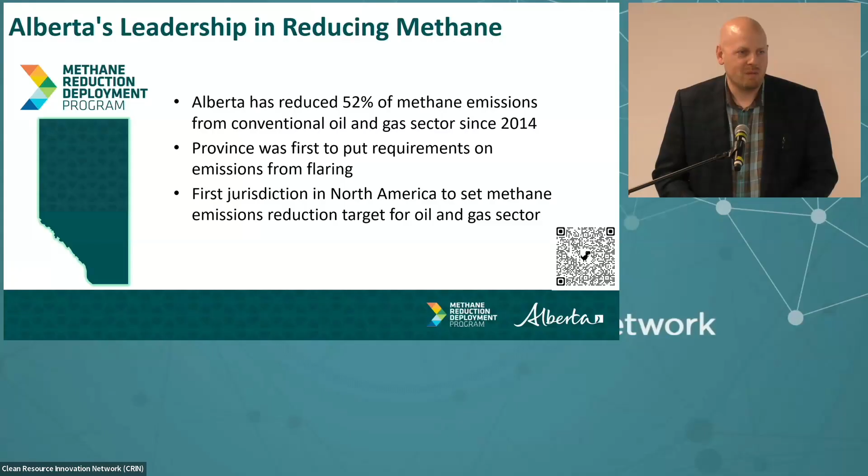CRIN's role in this is to help with the business development and industry outreach side, so I hope that anybody online or in person here that wants to discuss the program further, get a hold of me. I'm happy to talk about it. That's what I'm doing, and one of our members, Modern West Advisory, are actually delivering the program along with ERA. So lots of involvement there, and very, very proud again to be involved in that.

It is a $22.4 million project, covering up to 50% of eligible costs on emissions reduction projects, up to $1 million per project, and also $1 million per participant or parent company. So if you're an oil company, you can get up to $1 million of funding, which is essentially a $2 million project when you look at 50% funding.

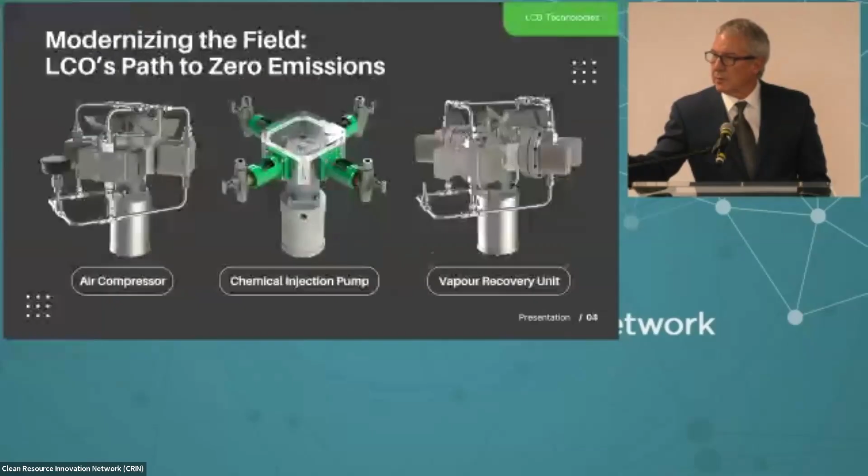Hello everyone, thank you for the opportunity to talk today. I'm Steve Froehler, owner of LCO Technologies and the inventor of that piece of equipment right there. This happened to me the last time I was up here - I think I need somebody smarter than me to... here we are.

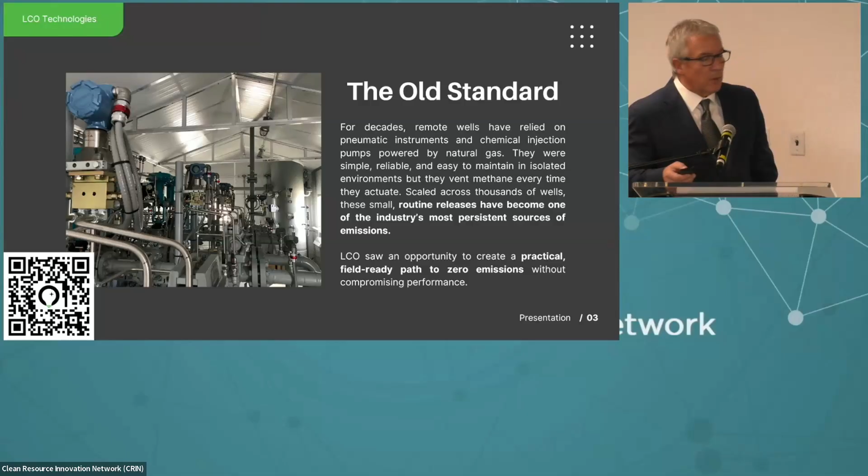So LCO Technologies, that's me. Been at it for 30 years, working on the Crossfire for about the last 8. I was asked to do this on an educational basis, and I apologize in advance, because I think everyone here understands how we've taken this journey in Alberta to reduce our methane emissions by 52%.

But there are a lot of people online watching this who don't understand how we've done it. Frankly, I'm astonished at times talking to people at various events, especially back east, when we ask if they're even aware we've done this - and the answer is no. So I'm happy to be here to reinforce that we're kind of killing it out here, and I'm happy to say LCO Technologies has made a fairly decent contribution to that effort.

This all started after 2014, when the industry looked at where methane venting was coming from in conventional upstream oil and gas. When a producer has to put a well in a remote location with no power, they'll take a small amount of gas from the well and condition it on site - knocking out the water and sand. Now they've got clean methane, or clean gas.

It's rarely ever just pure methane, but they've got this clean gas they can use like air in a garage where you'd use an air gun to take off a tire. In this case, we're using this gas as a means of manipulating instrumentation - to control pressure, level, flow, and drive pneumatic-powered chemical injection pumps. The naughty bit is after we finish exploiting the pressure, we then vent that gas to the atmosphere.

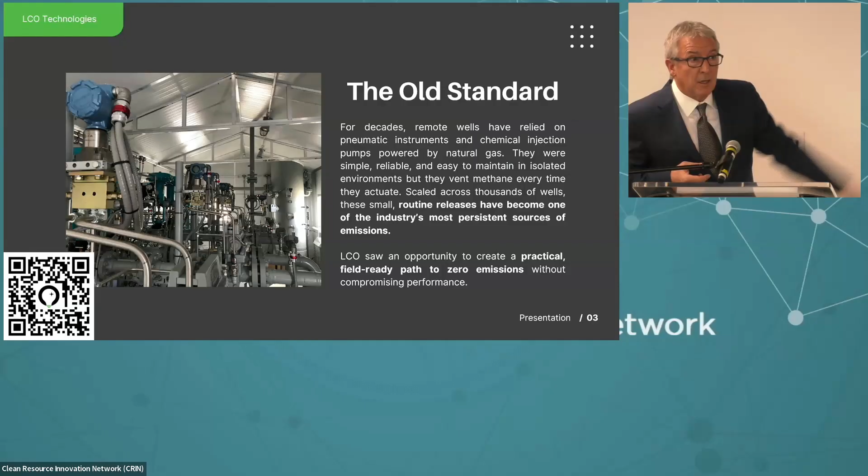So here we've got 3 examples of the equipment. We've got an air compressor, a chemical injection pump, and a vapor recovery unit. These are the 3 key areas from conventional upstream oil and gas that

emit quite a lot of gas into the environment. And we have solutions for these, but it's not as straightforward as I make it sound. It's not super easy to just take air and a compressor, run it on solar, and have the problem solved.

It's not that easy. It started with taking high bleed relays that were in all that instrumentation. You saw that skid we showed you earlier. I don't know how many relays were in that unit, but they started off with what were called high bleed relays. The industry saw an opportunity to significantly reduce their carbon footprint, or the amount of methane gas they were venting, by simply changing these relays from high bleed to low bleed.

Great, so you've reduced your methane output by, how much was that, Blake? About 5 to 8%, or 5 to 8 times. So in some cases you were getting down to 1/8 of the original amount of gas being vented to the atmosphere, but you're still venting. It's better, but not quite perfect. But it was a really great way to significantly reduce the carbon intensity of conventional oil and gas.

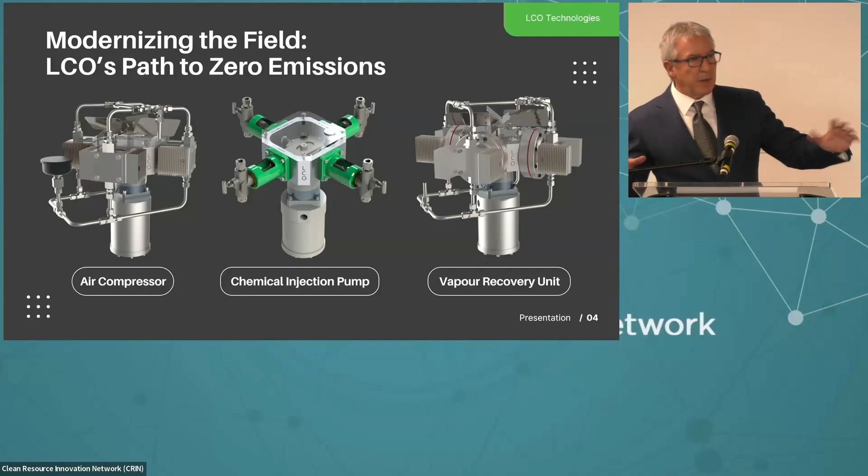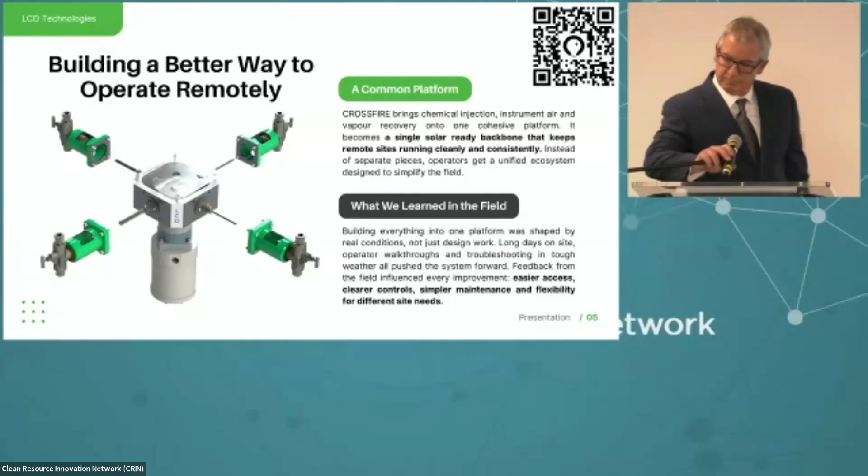We're using a common platform. The piece in the center is the common platform—that's an explosion-proof drive. It can be configured as either a pump, a compressor, or a VRU. So you see the section in the center here—that becomes common to all three pieces.

The beauty of it is I can mass produce it, and I can do it for less because I can mass produce it. It makes it easy for end users because now it means fewer spare parts, easier to get equipment.

Ultimately our objective is to prevent methane emissions and improve efficiency. The problem with everything we do here, being environmental, is that even though everyone talks a big game about wanting to protect the environment, our equipment is still considered, for the most part, just an expense. It's an expense and it's hard to justify—well, it's not hard to justify, it's hard to reconcile when you're talking to shareholders and things like that.

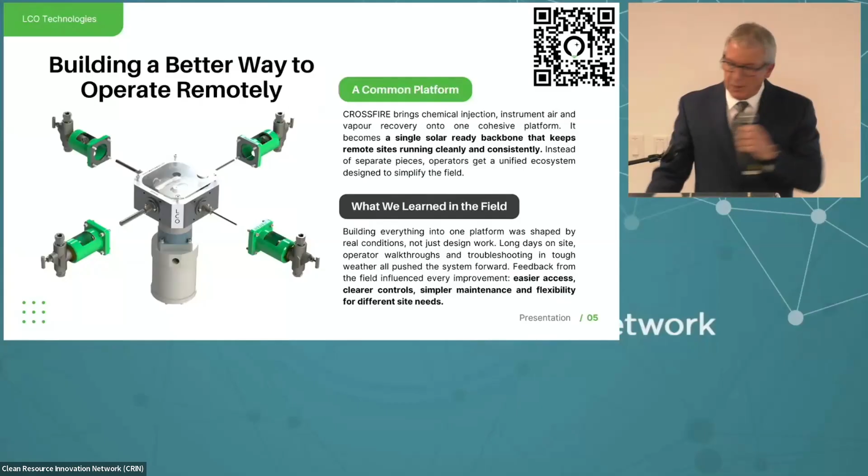What we need to do as technology developers is deliver more than just eliminating methane emissions. We need to deliver productivity gains. We need to provide things like data. We drive the equipment with a microprocessor-based controller, and we're gathering data. We're giving people information—the ability to make decisions based on data rather than routine.

So is there a benefit to this? I'd say yes, there is. Instead of an operator going out to a site because that's what they always do, they can go out based on some sort of exception conveyed to them through data acquired through the equipment. So it's not just environmental improvement, it's operational efficiency gains.

If we can't as a group deliver that—I'm not counting on Alberta Environment to make my business plan. I need something I know is palatable for more than just the fact that we're doing something to help with emissions. And I think we've done that.

On the chemical injection pump, we're doing things like accurately controlling the delivery of chemical. Hit your chemical budget spot on every month—that's money in your pocket. That's ROI.

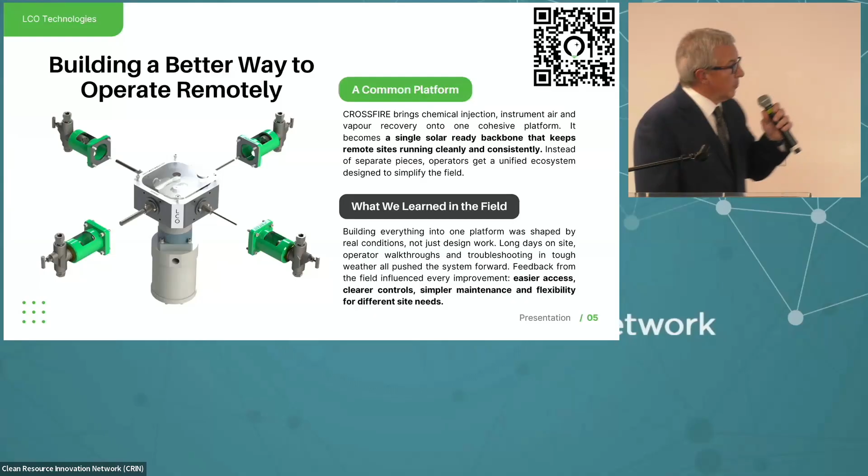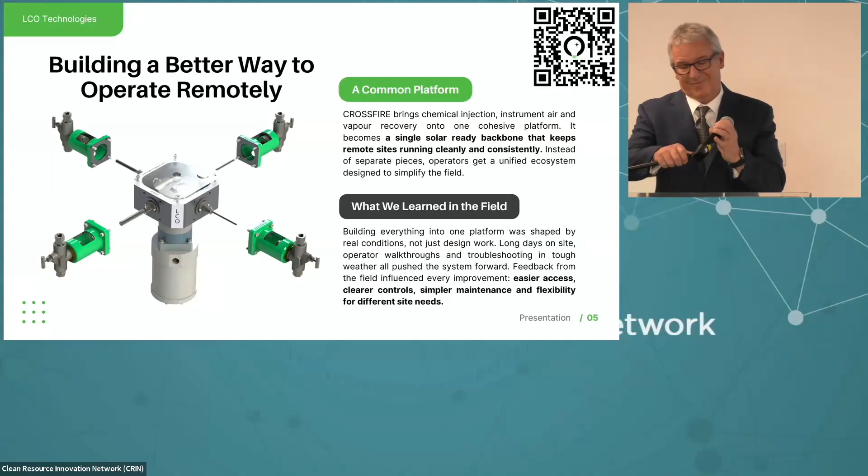And now I'm about to start pedaling, so I'll just say thank you very much for your time, I appreciate it. Thank you. If there's any questions, anyone? Yeah, we'll do questions. Oh, okay. This thing is a bit of a pain in the ass. Thanks.

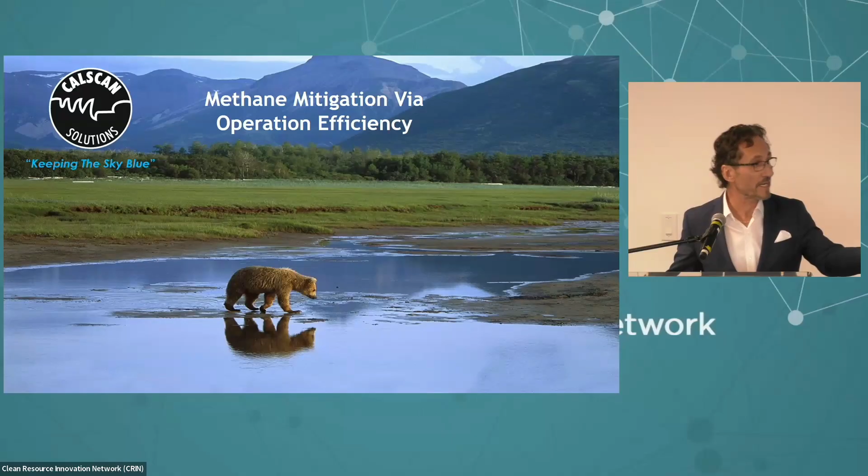My name is Doug Baspalko—let's just keep it at Doug. I'm the technical sales manager for Calscan. For those who don't know, Calscan is a Canadian Alberta company headquartered in Edmonton. We are the manufacturers of the technology I'm about to present to you at a very high level. We approached the methane mitigation journey from a bit of a different angle.

Steve brought up some very good points about the emissions challenge. We decided to go the solar route. So imagine operating your well sites with solar power.

How many of you adjust a thermostat in your house for the heat? Gas comes on, it's all electric. It's simple. We've been able to simplify this, and again, we approached it from an efficiency point of view. Whenever you're efficient doing something, you're automatically saving energy, you're saving emissions.

Okay, now let's go to the next slide. So these are some of the achievements we've already done with our solar power, and I'll get into that a little further. There are major operational and regulatory challenges because of the new regs that are coming in, and everybody wants to operate efficiently. Currently, to date, we're approximately 400,000 tons of CO2 equivalent that we have saved with our technology.

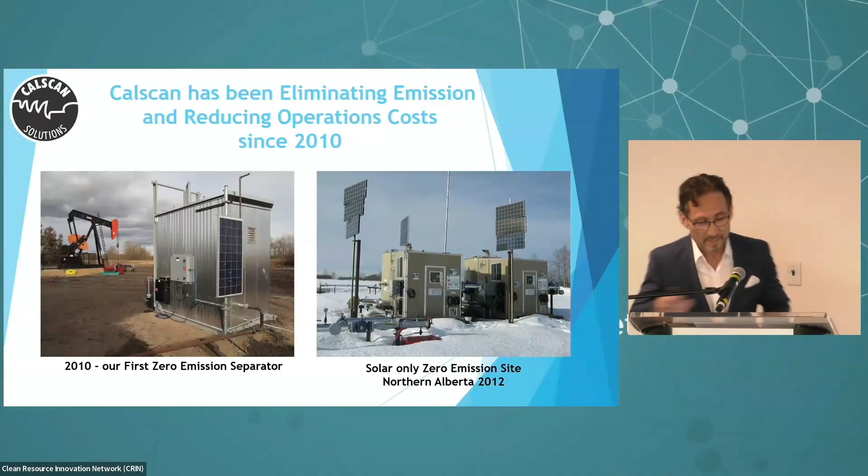The question we get asked is, does it work in the north? We currently have several hundred sites operating in northern BC and northern Alberta, strictly on solar, and a majority of them running with no backup. In other words, solar panels charging batteries that sit there and keep the operation going without any backup generator.

There have been some cases where there was some skepticism where they did put a generator in there for about 6 months. But with a generator, you have to go and start it up every so often so it starts when you need it. So these are real-world sites running totally on solar, reliably, and we've proven that it's been able to run with very low sunlight. Most of the calculations, the minimum sunlight is 2 hours a day on a bad day, or an hour a day, but we size the systems for that.

Now, along with our journey with our electric valves being efficient, to operate them, like I said, you need a little electric motor on top or a little electric device. It's to change the way we look at the technology we've been using in valve technology for the last 40 years. If you go to some of these sites, they've been operating for 30, 40 years, and they operated very well. However, with the old technology utilized in them, it's time to improve them and optimize them for efficiencies.

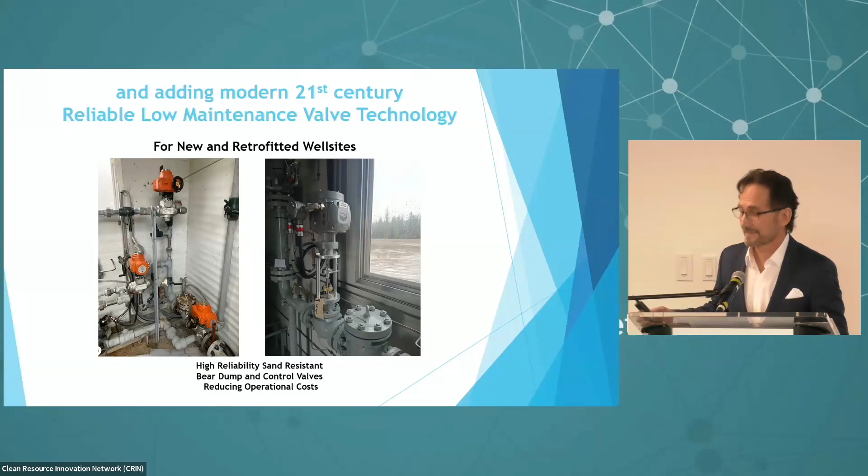Secondly, is it affordable? Our technology, we've had an ROI, which is a return on investment, in less than 6 months on some of the marginal wells. In other words, a well that's barely producing. It's eliminated the operational costs, it's eliminated the maintenance costs, to the point where they got payback for our equipment in under 6 months.

The last and most important thing is high environmental performance. How is the technology impacting the environment? What did it take to build the technology?

What does it take to dispose of the technology? What's the cost of maintaining the technology and its environmental impact?

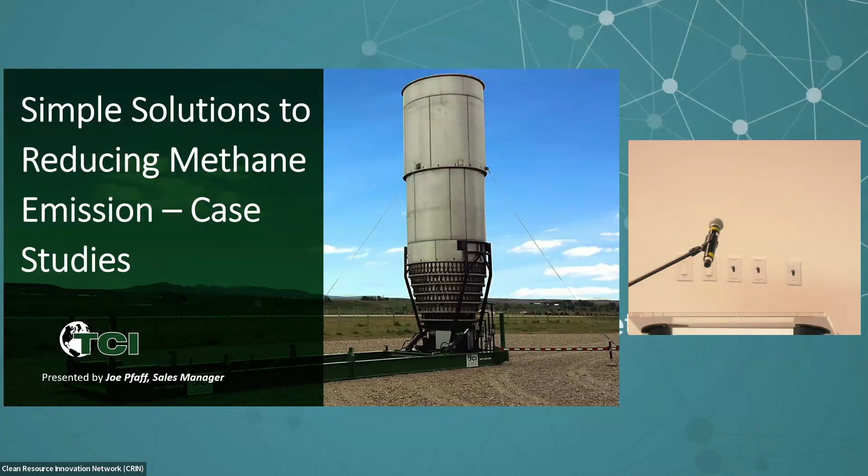For total combustion, what we do is enclosed combustion or incineration in the upstream and midstream oil and gas space.

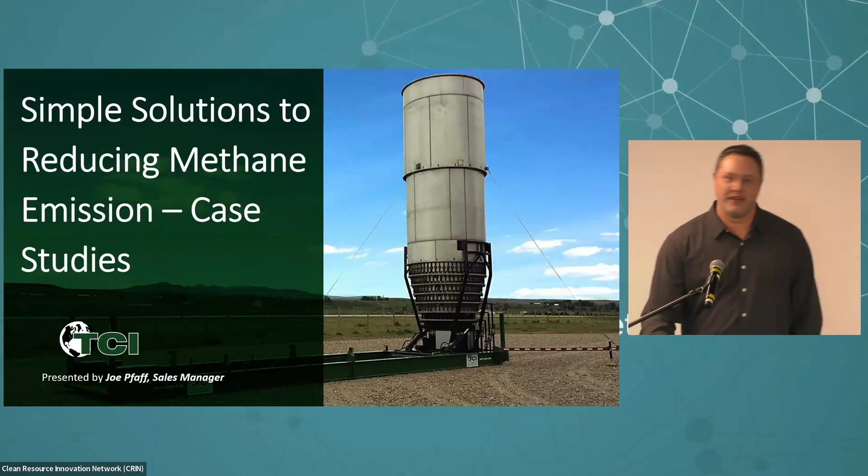To start with us, we've been in business for over 25 years now, right in the heart of Alberta. Our manufacturing facility is in Red Deer, Alberta.

We've been shipping equipment worldwide since the beginning of the inception. Our major stuff that we really started with was in and around Calgary and Sundre,

and the initial part of this technology was to hide the flame so that it didn't bother any of our neighbors.

But let me get into how we can actually accomplish that. We engineer these things as simple as we possibly can. High quality stainless steel stacks for the life of the equipment, natural draft, so there's no power on site for fans or anything like that. We can have an ignition system that runs completely on solar.

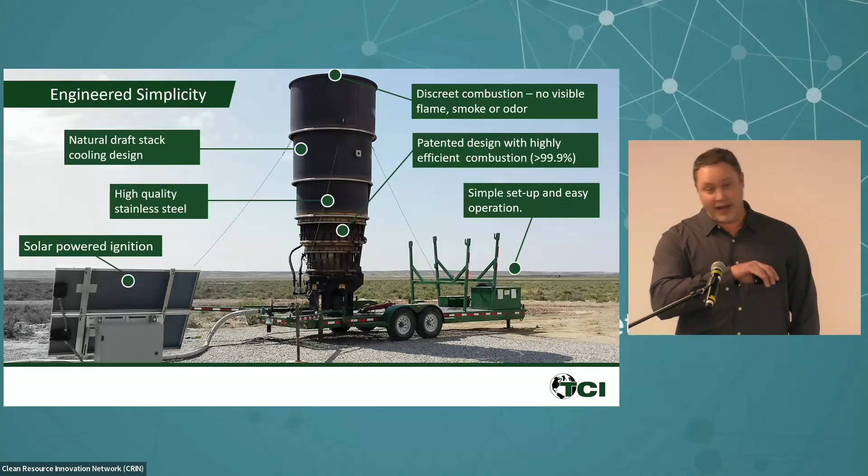Trailer mounted and different applications for that. We have our classic series, which are typically pile mounted on a facility wherever they have any stranded gas, from 200 cubic meters a day all the way up to 110,000 cubic meters a day.

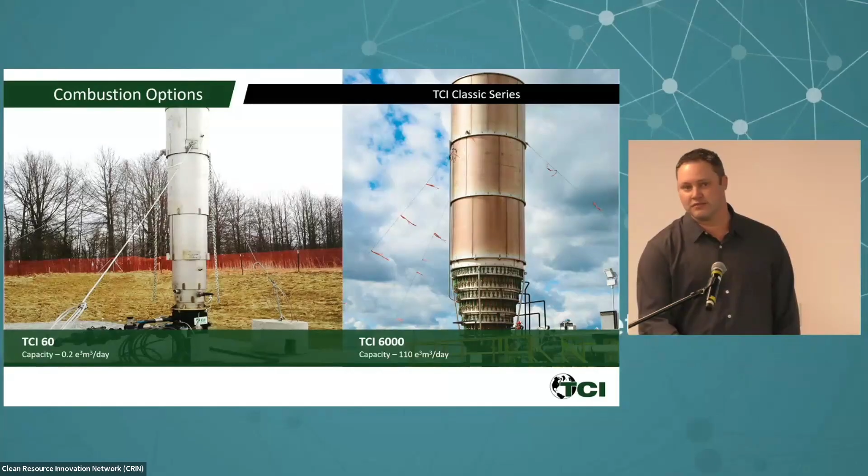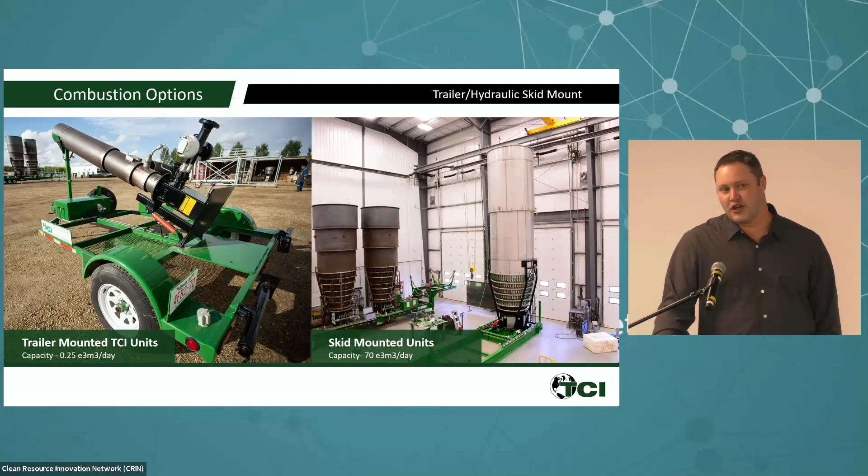Again, different ways that we move these around. We have trailer mounted units, skid mounted units, and I'm going to kind of touch on where those pieces of technology fit in.

In the upstream oil and gas industry, we have various different ways that methane is vented or needs to be destroyed. One of the biggest ones that we've looked into over the past few years is vented gas from oil production tanks.

One of the greatest things you can do with that gas is put a VRU system on it and capture that gas. That's not always economical to do if you have nowhere or no infrastructure to send this gas to on these remote sites.

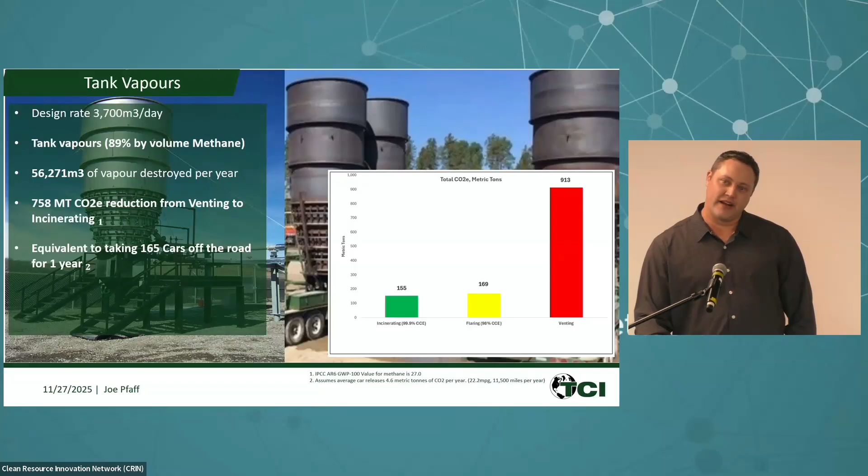This is a project that we just completed. It is tank vapors up in northern Alberta. What we've managed to do is burn or combust at 99.9% combustion efficiency, 3.7 e3m3 of gas daily. What does that actually mean for emissions reduction? That's like taking 165 cars off the road compared to venting that gas, which was previously done many years ago.

Next one that we're seeing in this space is casing gas. On your low end casing gas, up to 300 cubic meters a day, it's not economical to move it into a pipeline or capture it. So the best thing that we can find to do with it is to combust it at 99.9% combustion efficiency. What that does on a small scale is 9 cars off the road.

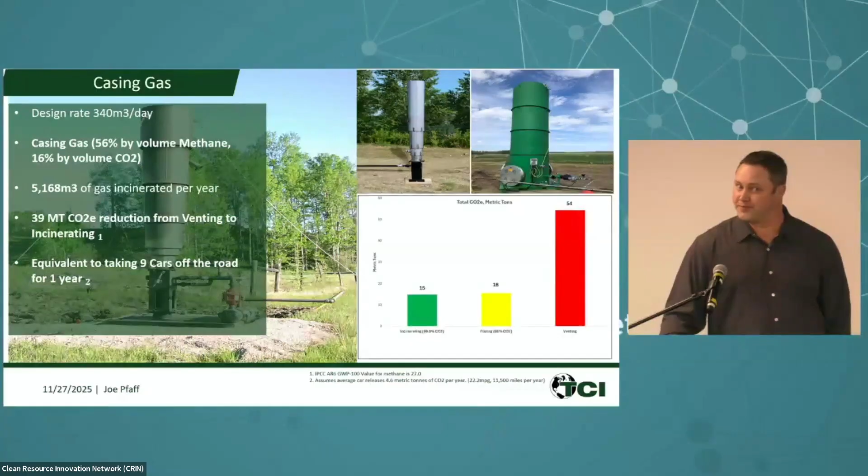But you got to look at this from a little bit higher, broader viewpoint. There's thousands of wells in Alberta, Western Canada, North America, worldwide, where casing gas is being vented where it could be burned or combusted, destroyed.

After that methane gas is produced and cleaned, it needs to be transported to its clients, which is us, heating our homes and different chemical factories. So through transmission lines, they got to do routine maintenance, blow down, so they need to depressure those lines. The best way to reduce their emissions for that is cross compression.

The constraints with cross compression is you are shutting down that pipeline transportation for longer periods of time than you wanted. So what we're doing is using cross compression, bringing that line pressure down to where it's no longer economical or feasible to move the gas anymore, and we're evacuating the pipeline through our combustion technology.

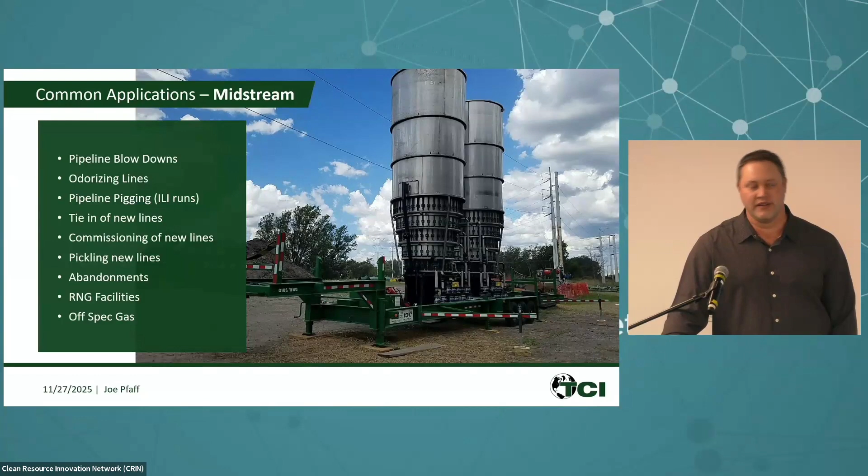What does that mean? How does that reduce emissions? This particular blowdown was 2 sections of 34-inch pipe. It was about 105 kilometers long, I think, the one section. We did this in 70 hours, which is roughly a quarter of the time it would have taken to use cross compression.

What does that actually mean? 3,400 cars off the road on one job in 70 hours. This type of work is completed throughout North America daily.

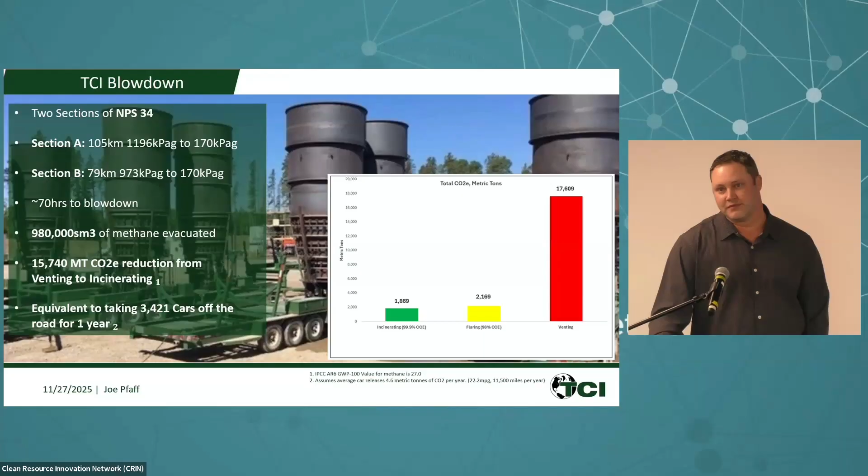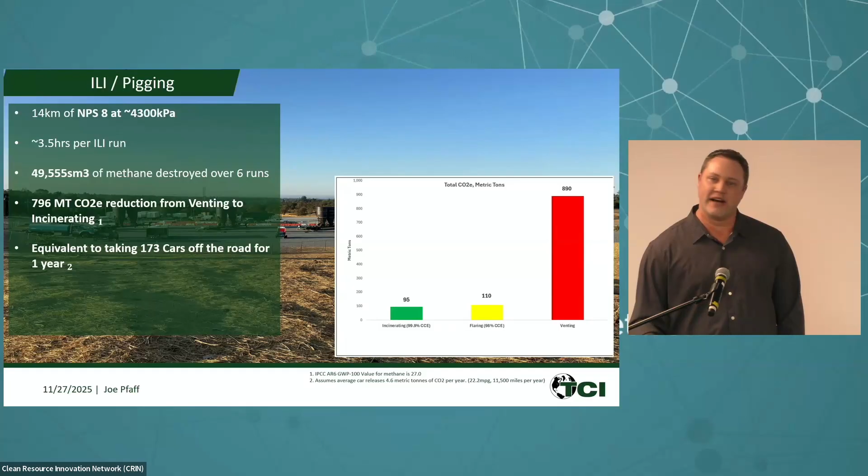Another section of it is when you're using ILIs, or inline inspection tools. Sometimes the flow isn't generated enough naturally, so they need to move the tool at a specific speed to get the data. What we can do is put our incinerators or combustors on the end of the line and artificially draw that gas through the line for them to do their inspections.

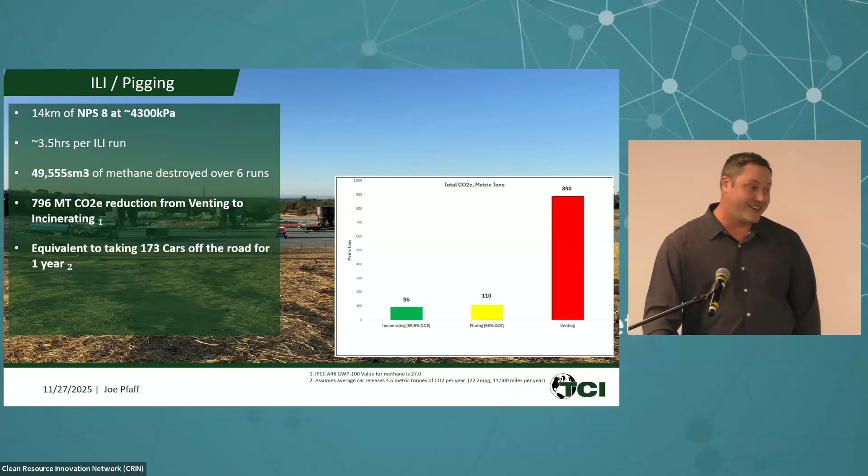This particular project we did here was 173 cars off the road in a year, and this was a week-long project. And you can see throughout North America that these projects are going on weekly, daily.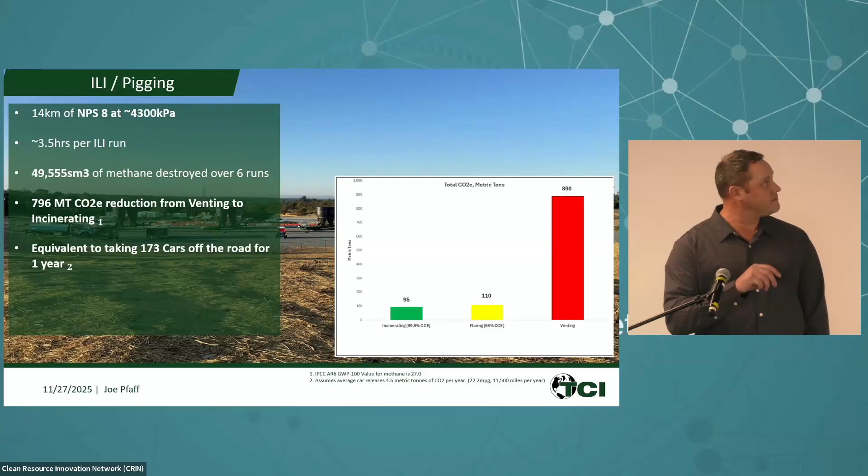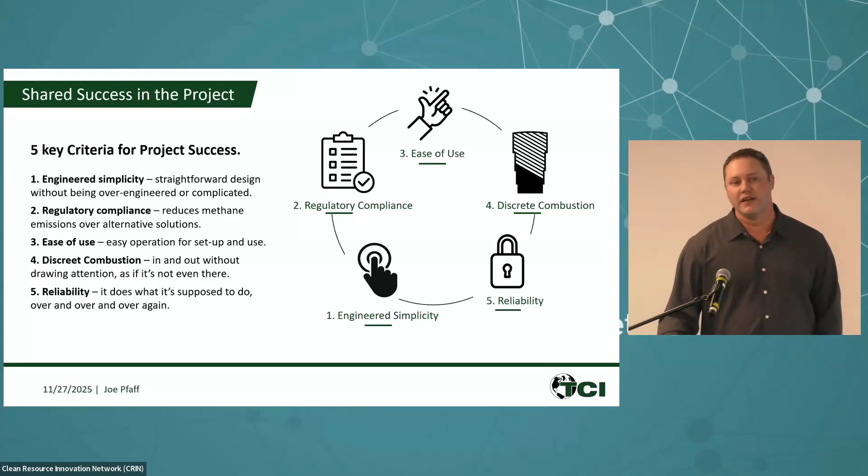When you're using something like our technology, we would like to be a little bit upfront on it, knowing the whole parameters of it, gas analysis, and we kind of engineer a solution that fits within your budget and your time frame.

Why would you use TCI? Reducing downtime, zero disruptions to the public, reduced methane emissions, meeting upcoming federal regulations and reducing carbon tax payments. Flow testing new assets without affecting the network and your ESG constraints.

I'm a little bit quicker than everybody else, but some of the fun stuff we've been doing is shipping equipment and working in the Middle East on a few of their projects over there. They're actually looking at reducing their methane emissions just as much as we are. Throughout the United States and South America, they're looking at these technologies as well and how they can start producing their oil and gas at a lower emission rate. But there's definitely space for improvement for everybody and operational efficiencies.

My contact information is down there at the bottom, and thank you very much.

Thank you, Blake. Appreciate the opportunity to be able to speak to you here again today. Just a little bit of background about myself.

I've been with Spartan Controls for just over 20 years now. I've been focused largely on upstream oil and gas, petrochemical, and oil sands industries, and a lot of my focus has been helping industry be more efficient, help them waste less. So if there's opportunities we have to improve air quality, or if we can reduce methane emissions, improve our water use, or really just stitch these things together in the context of energy efficiency as well, there tends to be a business case for doing that. So it's really nice that we can make improvements, and if there's opportunity to do so, again, where there's kind of a compliance with ROI, it tends to be where my focus has been.

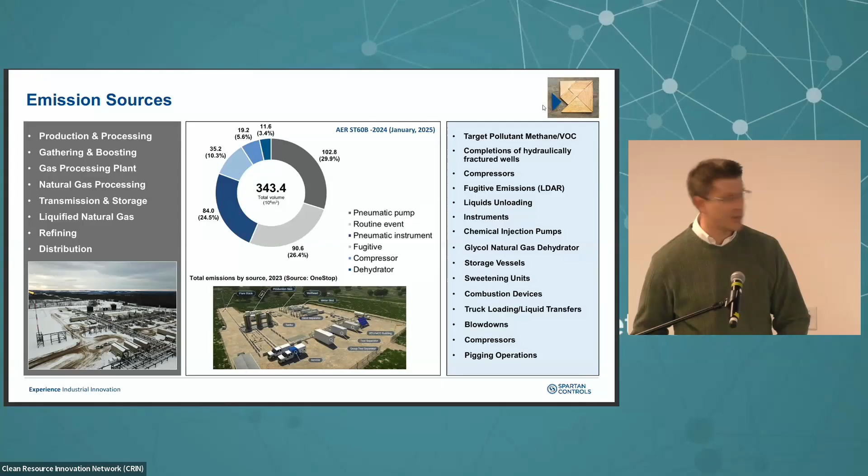Okay, so just as an overview, we heard some of the highlights of improvements that are being made. What we see here in the top chart is data published by AER, in a report with the ST60B data, and you can see where the different sources are. There's lots of opportunity to improve with those different buckets, coming from different parts of the upstream and midstream infrastructure and the assets on the right. There's certainly opportunity to improve, and the transition to lower carbon intensity hydrocarbon production remains a key focus going forward, the same as we've been leaders in the past.

There's a lot of content on this slide, so I wanted to walk you through it step by step. When we're trying to improve outcomes, we have to understand the magnitude of the emissions we're able to achieve. If we're looking at an instrument air supply and we want to claim carbon offset credits, we need to meter that to register the amount of air used to displace the methane otherwise used in pneumatic control loops. If we're looking at surface casing vent flow, there's lots of different metering technologies as well. If we're able to include that in an update to the vent gas reduction protocol in Alberta, we have to quantify the emission reduction achieved.

Maybe there's operations with volumes going to flare. Can we optimize the volume that goes to flare? Could we reduce the amount burned there? That would be an opportunity for improvement. In all of this, what we're really trying to do is see if there's opportunity for incremental reductions, even just small percentages. When you think about the quantity of assets in the field, there's a significant gain that can be made just by thinking about the frequency of those events in the field.

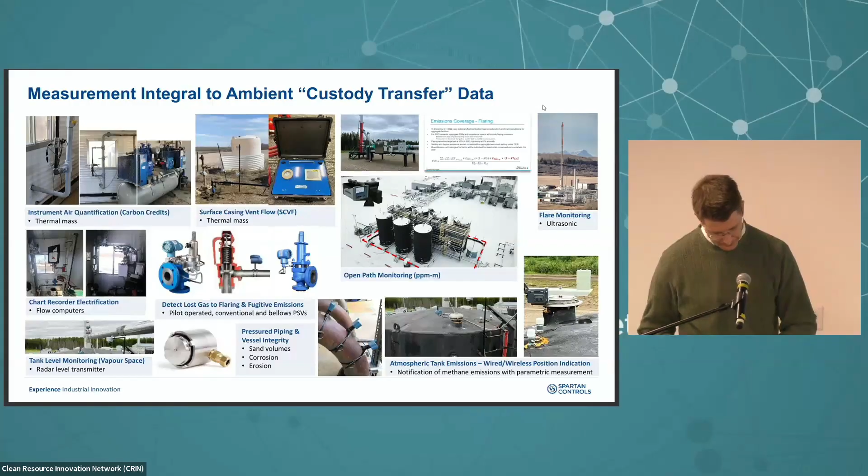If we look at what Steve or Doug had touched on, there's lots of opportunity with electrification of assets. In the top left, you see electric chemical injection pumps. We think that still remains very much low-hanging fruit in the industry. There's opportunity there not just to reduce methane emissions, but to improve the chemical use you have and make sure it's exactly what it should be and not over-injected, so you're realizing operational savings that way.

Certainly implementing instrument air is an option. You can imagine there are a lot of legacy well sites where doing a retrofit with electric actuation could be viewed as a higher cost than is reasonable or economical. Or maybe it makes more sense to put an air compressor at that site, and then that compressor could be cycled to future sites to achieve those same methane reductions. Using instrument air, though, requires a reliable air compressor, so there's a new asset that needs to be maintained, and you have to make sure there's sufficient header pressure to operate the pneumatic control valves, chokes, CSDs, et cetera, at the well sites.

In the maintenance of the air compressor, you have to make sure there's sufficient power to operate it. If it's on a solar system, there needs to be a large enough battery bank for the shorter days in wintertime. We also have to make sure the instrument air is properly cleaned and dried. We want the highest purity possible, but if there's moisture in there, that's going to be an operational concern, especially in wintertime, because it could freeze off your lines, and then your actuators could be unable to stroke properly, or could get locked in place, or trip into their fail-safe position.

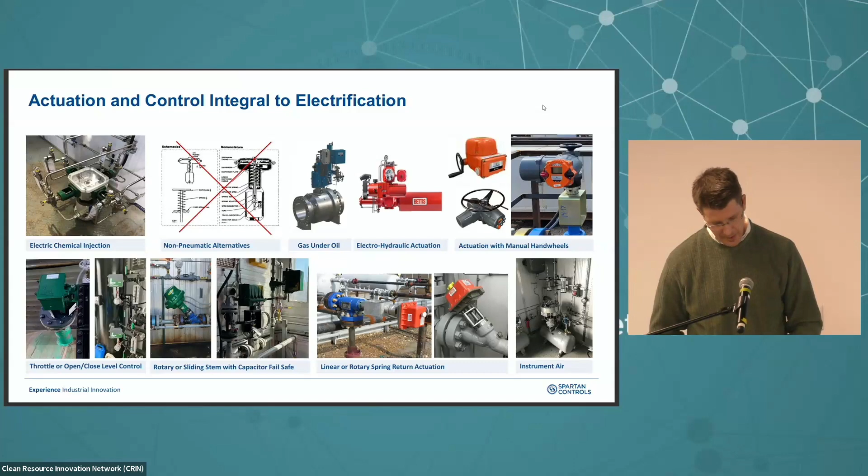So certainly using instrument air is an option, but it depends on the reliability of that whole control loop. We think there's a lot of opportunity, as Doug highlighted, with electric actuation today. If we can move into electric actuation, same as chemical injection pumps, then we're moving away completely from fuel gas pneumatics, and it has its advantages as well.

And then there's a whole bunch of scope that we can improve in upstream oil and gas operations, midstream, that goes beyond what I've touched on. So if we're looking at the images you see here, there's a bunch more in the engine scope.

Spartan has a technology that improves the air-fuel ratio, and we've seen that that's been a key enabler of energy efficiency to fuel gas use. Optimizing that often results in emission reductions from the stack. If there's improvements in NOx emissions, that helps us meet the federal multi-sector air pollutant regulations as well. With better combustion efficiency and modulation of new fuel intake, there's opportunity to do vent gas capture. If we can capture emissions from things like compressor packing vents, then again, we're able to run the asset but using less new fuel gas to otherwise operate the engine too.

If we look at the stacks of the engines too, there's opportunities for catalysts there, reducing NOx emissions, and opportunity too with reducing methane slip in any combustion source. Steve had chatted about the flexibility of the LCO platform with the same motor drive. If we have the heads on it for vapor recovery, there would be opportunity too to collect some of the gas that could otherwise be emitted. If we can gather it and do work with it, then that's maybe the best approach, to have a closed loop control system. And then we don't have to actually change out the emitting asset, because you're collecting the emissions that came from it.